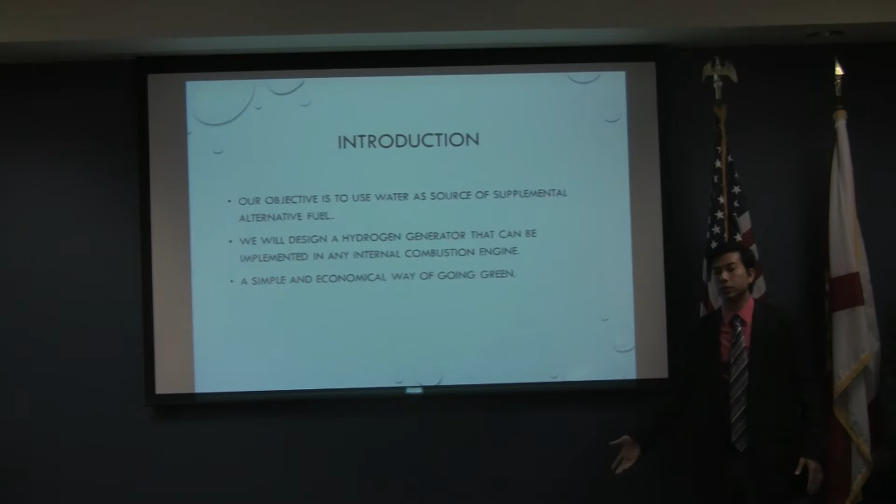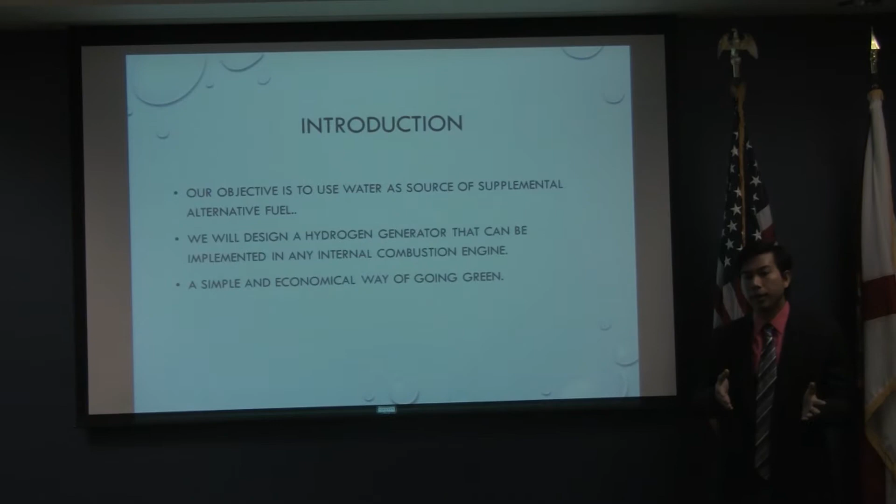The purpose and objective of our project is to use water as a supplemental fuel source. How do we plan to do that? We will be generating a hydrogen generator to be implemented in any internal combustion engine. It's a simple and economical way of going green because hydrogen is a non-toxic gas, and the less demand for petroleum fuel, the more hydrogen we use. So the purpose of our design is to create a hydrogen generator that will fit in any car running on the road today.

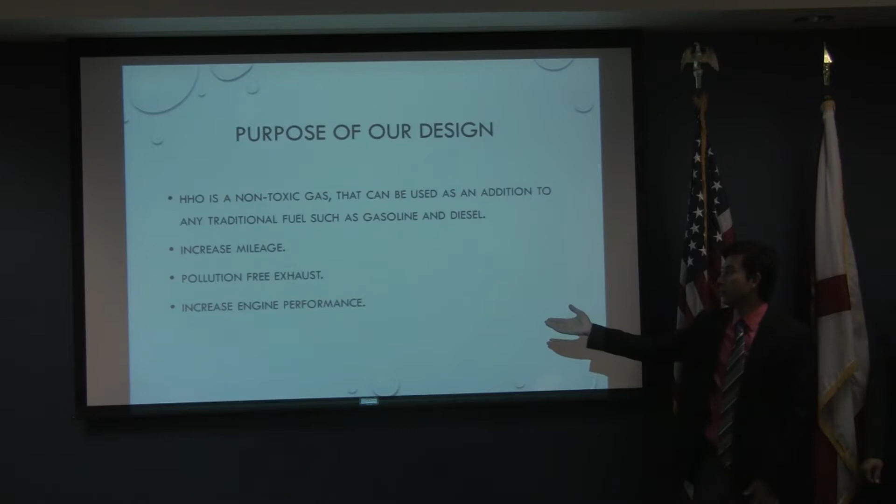Our goal is to increase gas mileage, resulting in saving money. It's a pollution-free exhaust because hydrogen combustion results in water-like form, and increases engine performance by running clean and lean. My colleague is going to talk more about how it works exactly.

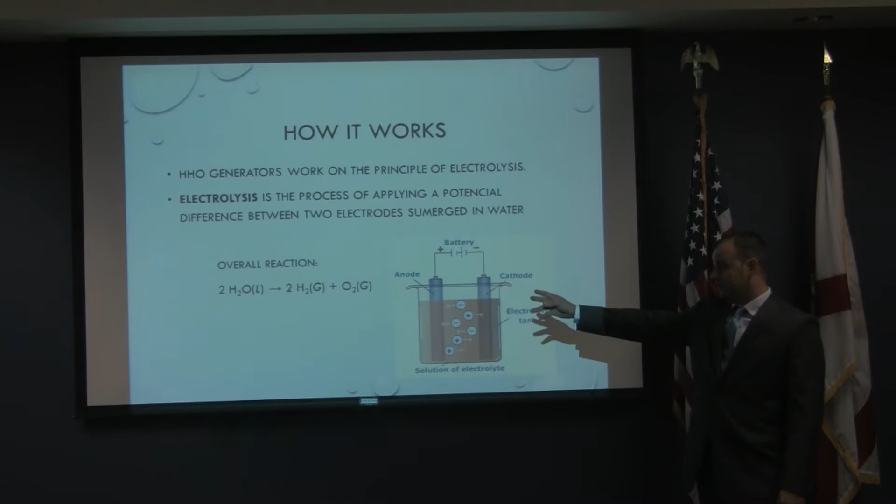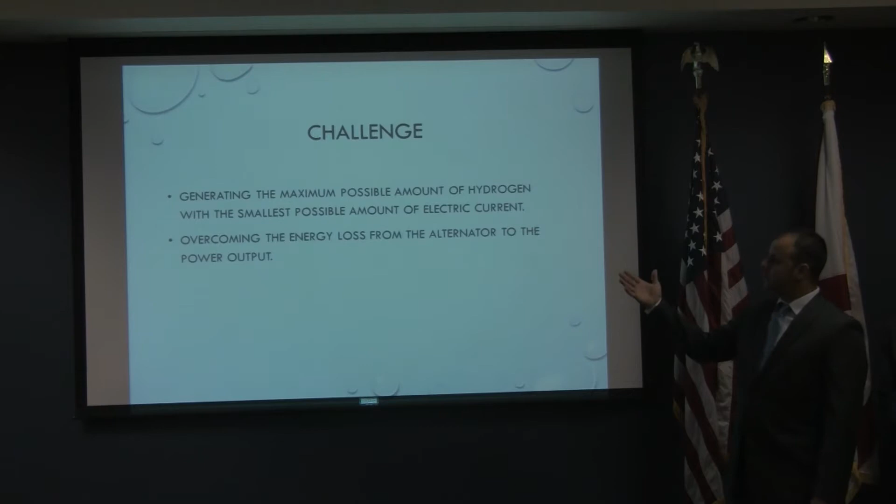Our design is based on the process of electrolysis. This is the process where you split water into its main elements, two hydrogen, one oxygen. That's why the name is HHO. We name it like that. Our main goal is to create a system, a design that generates the maximum possible amount of hydrogen with the smallest possible electricity input.

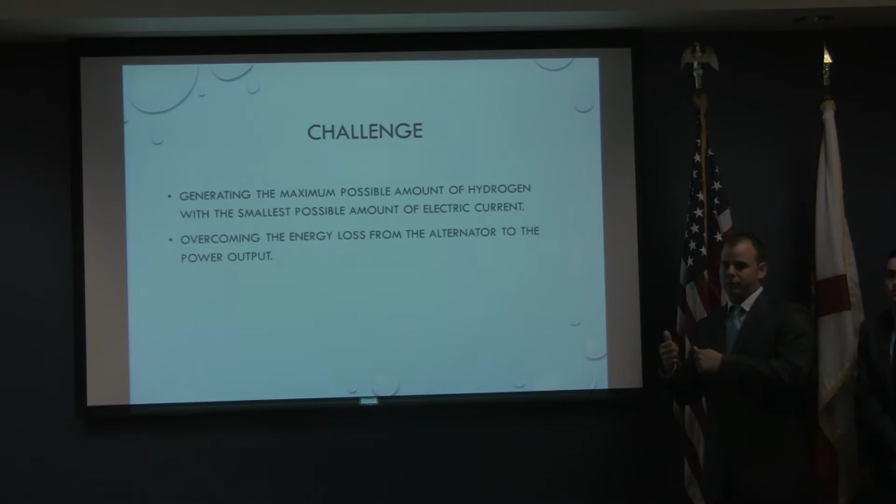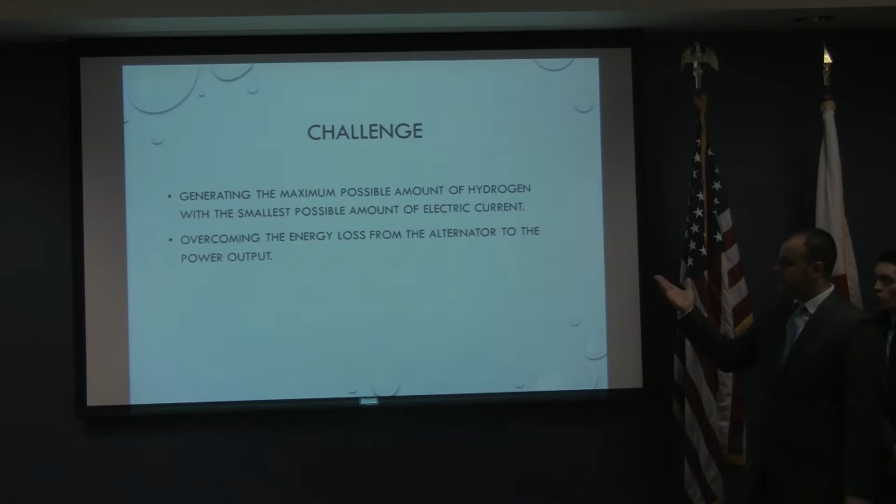Building an HHO system, getting electrolysis, is easy. You get a jar with water, some electrolyte, a battery, two cables, you put it inside, you get electrolysis, you get HHO coming out. But our goal is to implement the right design to get the maximum hydrogen out of this system with less energy. Remember, when we put something into any engine or battery in the car, we're asking that engine to give us more power because we need to feed that system we're implementing. So at that moment we're asking the engine to do more, to give us more power. So we have to play with these values, what we're asking the engine for and what we're giving to the engine.

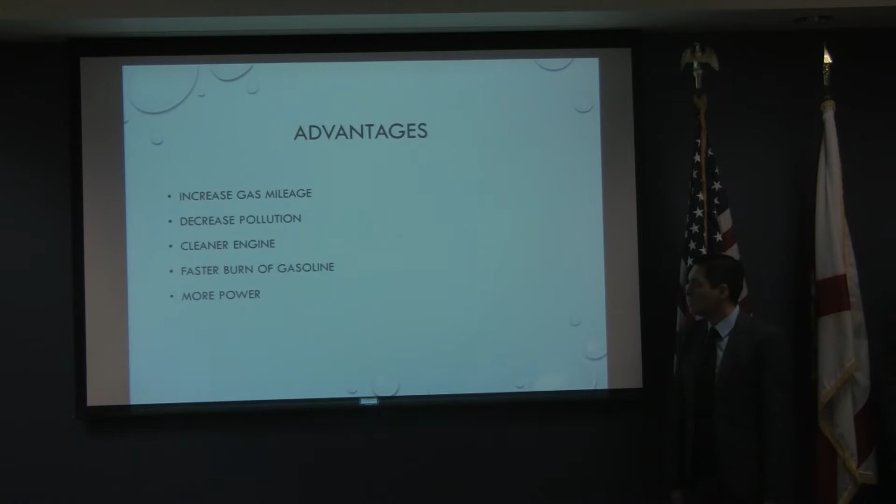Hello everyone. Some of the advantages include increased gas mileage, decreased pollution, a cleaner engine because this gas will actually help it cool down, and hydrogen also has a faster burn speed than gasoline.

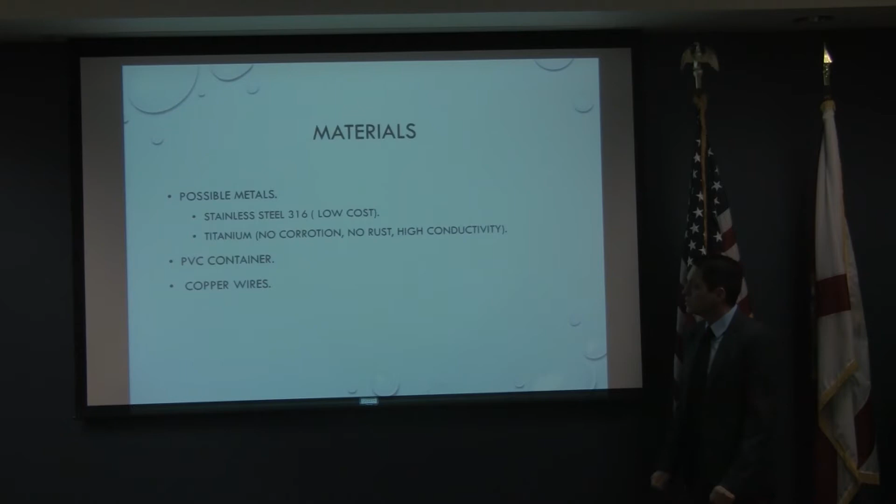Materials: stainless steel or titanium. We're probably going to use stainless steel because of the low cost. Other materials include PVC containers and copper wires.

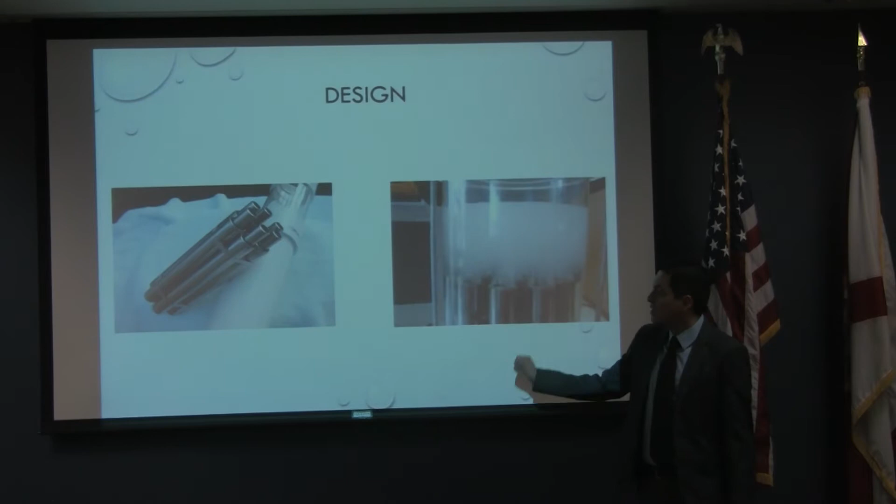Here's what our design most likely is going to look like. The outside tube is going to be the cathode, it carries a positive charge, while the inside tube is the anode, it carries the negative charge. The positive charge is the one that yields the O2 gas, while the negative one yields hydrogen.

Here are pretty much the main components of our project.

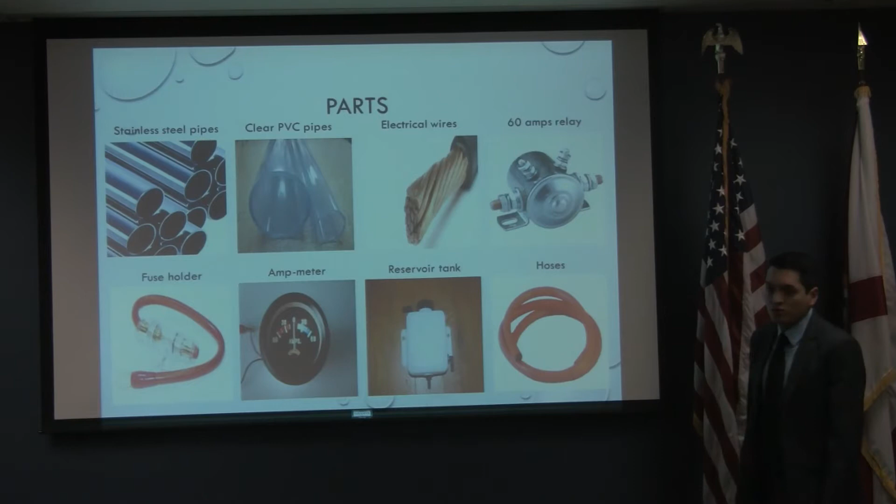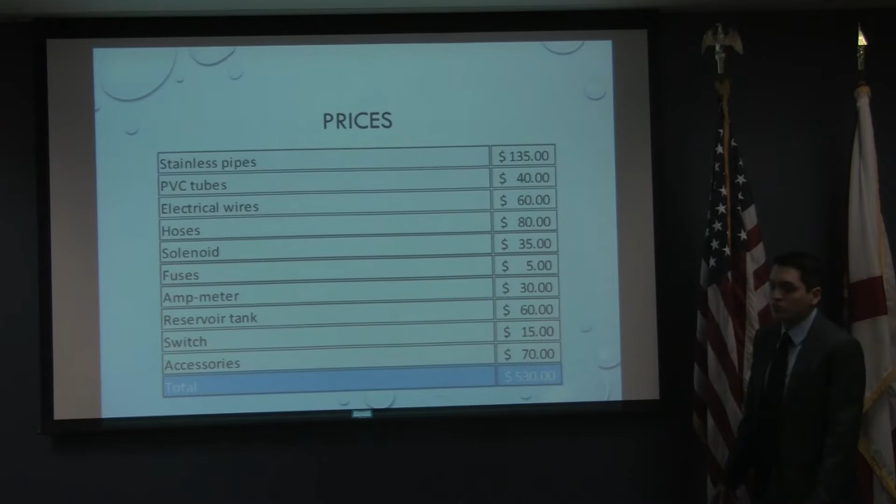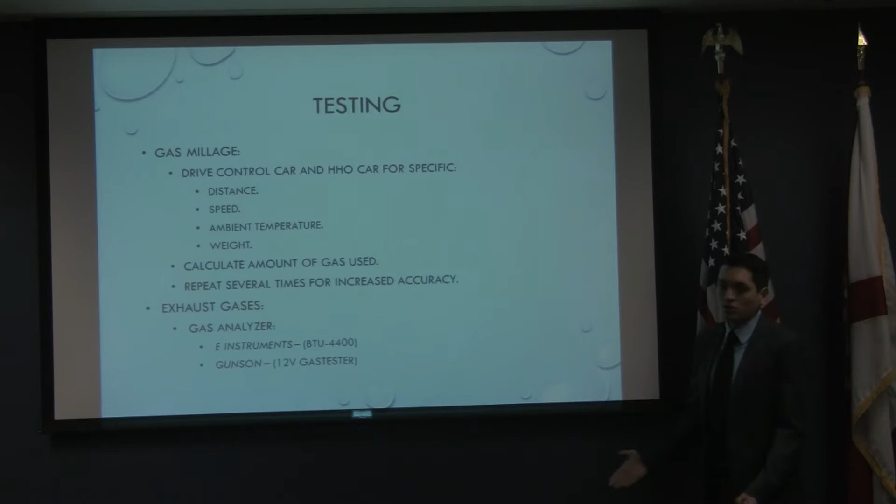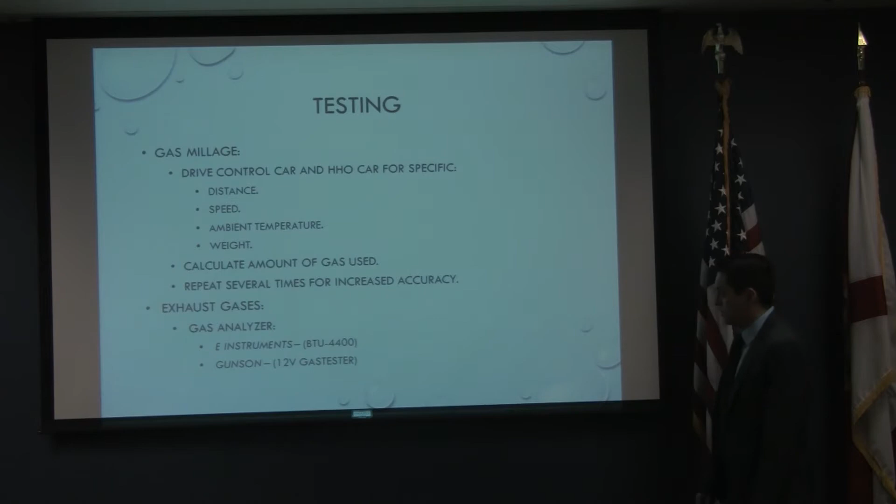Testing is a big part of our project, it's how we're going to measure the success of our thesis. What we're going to do is drive the control car for a given distance, speed, temperature, and weight, and then use the same car with the HHO implemented and compare results. Another test would be the gases coming out of the exhaust, and for that we have gas analyzers, two different types found online, and we're still searching into which one to use.

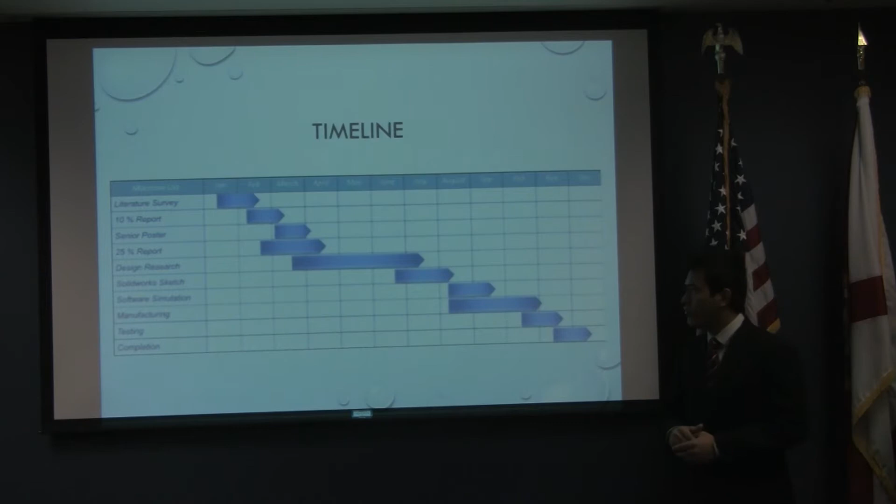Good morning everyone. This is our timeline. Right now we are in the design research phase. We've already done basic things such as the survey, the 10% report, the senior poster, and the 25% report.

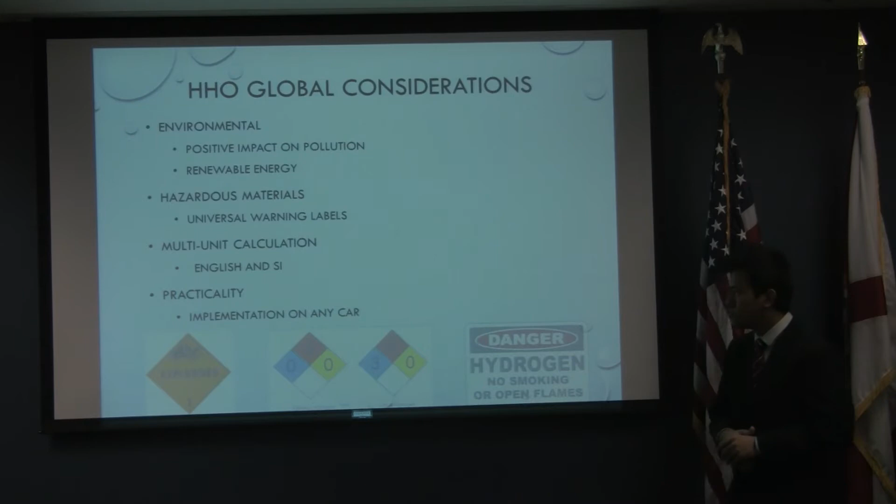For global consideration, environmentally, our hydrogen generator will have a positive impact on the environment, and it's also a renewable energy. For hazardous material, we're going to have a universal warning label for our product in the manufacturing process. For multi-unit calculation, we're going to have a standard SI unit and standard English unit. For practicality, we can implement our hydrogen generator in any car, diesel or gasoline, and we want our product to look as easy to use as possible, so we'll have a universal warning label and instructions.

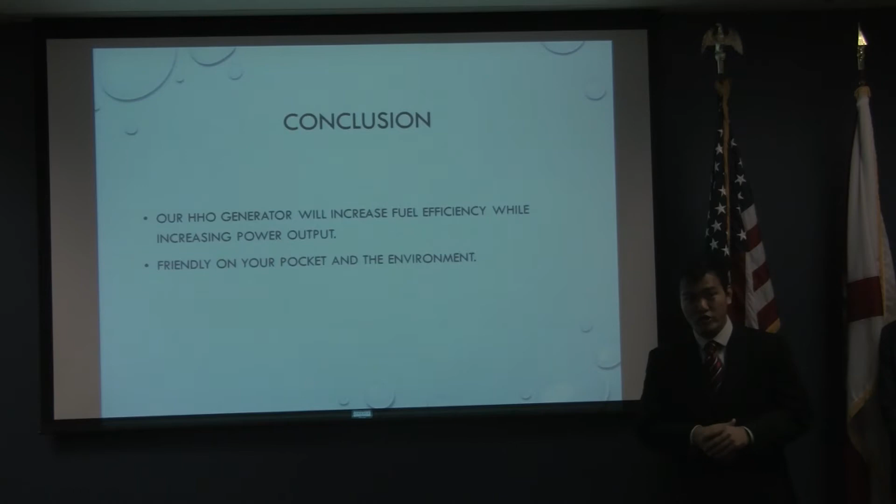And as a conclusion, our generator will have much more efficiency on the car and increase power output, and also save money with a positive impact on the environment. Thank you very much for the presentation.